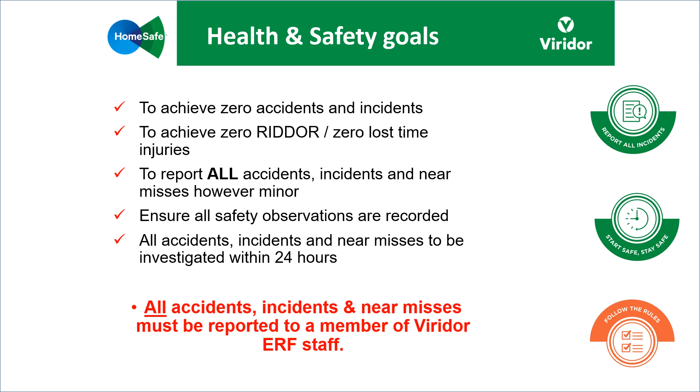These are our health and safety goals for this year's outage: to achieve zero accidents and incidents, to have no lost time injuries, and for all accidents, incidents and near misses, however minor, to be reported to a member of the ERF team, to ensure that all safety observations are recorded and all accidents, incidents and near misses are investigated within 24 hours.

CDM is short for Construction, Design and Management Regulations. This was brought in back in 2015 to improve health and safety in construction. The outage is covered by CDM regulations because the scope of the works being undertaken falls outside what would normally be considered general routine maintenance, and we're now considered to be a construction site for the period of the outage.

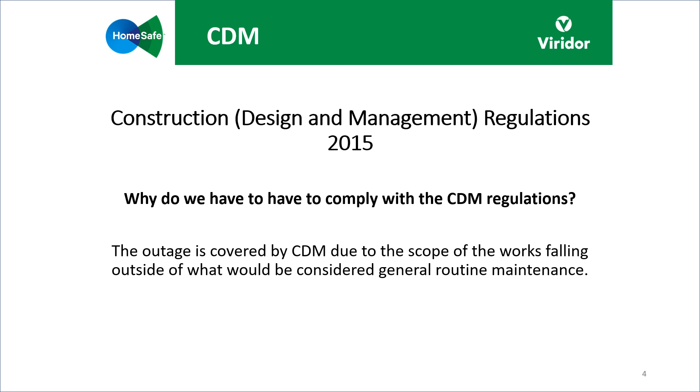BA Rescue will be providing our confined spaces management and security services on site, so please think of them as an extension of Viridor, and they will be able to answer any questions you may have around confined spaces or safety in general.

This slide shows the major works being undertaken during this year's outage and the main contractor assigned to each. If you have any questions, please reach out to a member of the Viridor staff.

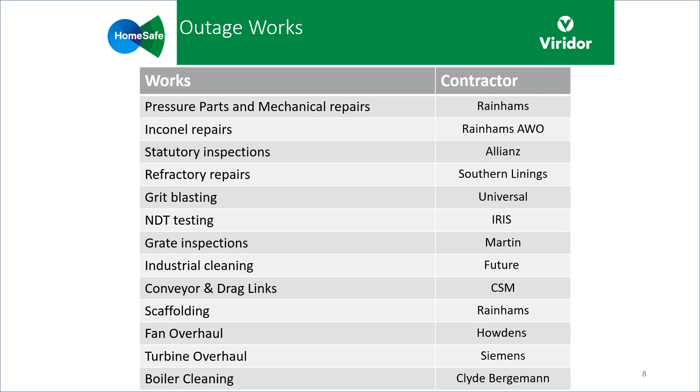So here's an aerial view of the site. Our weighbridge is located at Gate 1. The entrance to the Viridor staff admin car park is located at Gate 2. And the entrance to the contractor car park and welfare facilities is located off of Abbott's Lane at Gate 3.

There will be road signage to direct you to the outage village on the north side of the site, and the security office will be at the main entrance to the outage village. The main admin building is on the south side of the site, and the permit office is located on level 3 of the admin block.

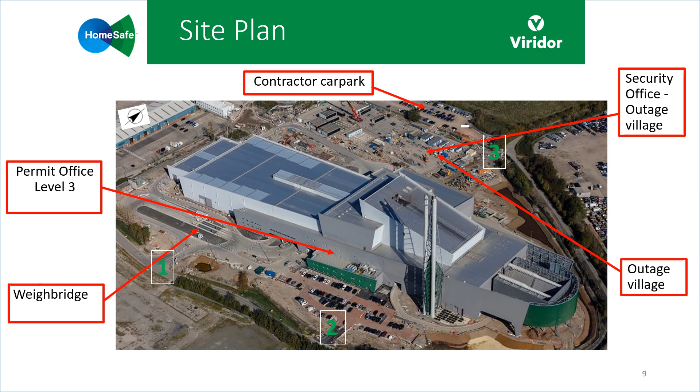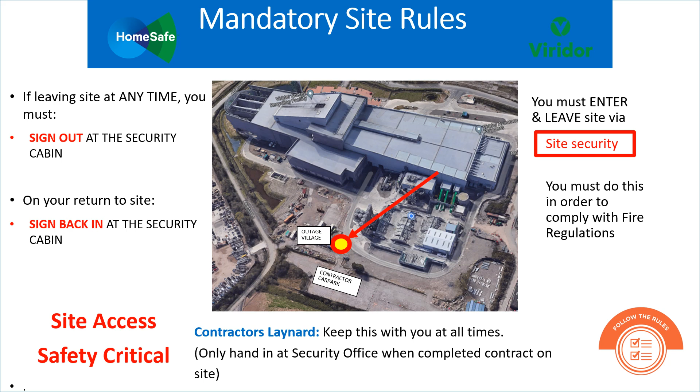The mandatory site rules and site access: you must always enter and leave the site through the site security office. This can be found at the entrance to the contractor welfare. You must sign out when leaving the site at any time, whether during your lunch break or at the end of your shift.

There's strictly no smoking or vaping anywhere on site apart from the designated smoking areas. There will be a smoking shelter in the contractor's welfare, and please ensure you dispose of any cigarette butts in the bins provided.

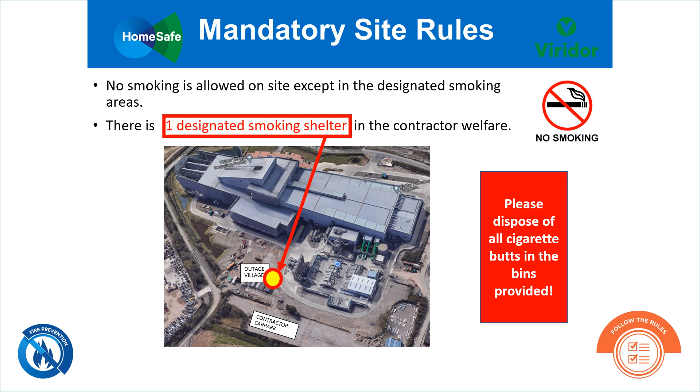It is strictly forbidden to steal, cause wilful damage, consume alcoholic drinks, bring illegal substances onto site, or engage in any other activities which could jeopardize the safety of any person. Such behavior will not be tolerated, and Viridor reserves the right to conduct random searches of both people and vehicles entering or exiting the site. An entry may be refused or you may be asked to leave if items found during a search cause concerns for the health, safety and welfare of all on site.

If you do not comply with the site rules, you may be issued with a yellow or red card. A red card means that you'll have to leave the site immediately, and listed on the screen are just a few examples of infringements that would lead to a card being issued.

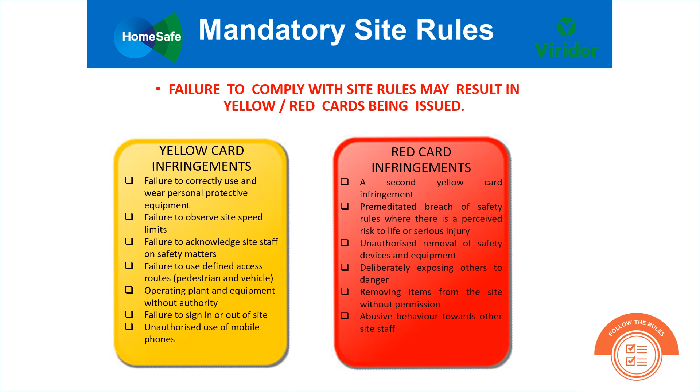The Operations Control Room is responsible for coordinating all emergency responses for fire, first aid, or spillage, and this will be done through the duty shift team leader. If you discover a fire, raise the alarm immediately and inform a member of the Avonmouth ERF staff.

Everyone on site must go to the muster point as quickly as possible if the evacuation alarm sounds. Not responding or responding slowly may lead to the yellow card being issued. Our fire alarms are tested weekly at 10 o'clock every Thursday. When the alarm goes off in this instance, please do not do anything. However, if the alarm continues to go off, or if you hear it at any other point during the week, you must proceed to the muster point immediately.

The muster point is located in the Contractors Village car park. All contractors must make their way there as quickly as possible and make sure you've been accounted for by one of the Viridor fire marshals. You will only be allowed back to your work area when the all clear has been given by a member of the Avonmouth ERF staff, and do not leave the site unless instructed to do so.

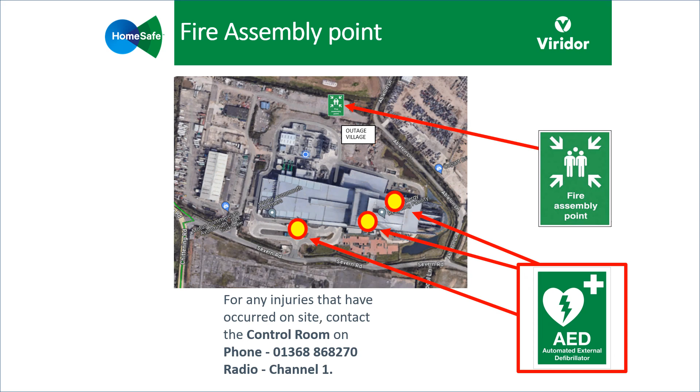There are also a number of automated external defibrillators on site, including the weighbridge, the Level 3 permit office, and the ground floor of the boiler hall.

Car parking is located in Gate 3 off of Ableton Lane, and remember you must reverse park. Please car share wherever possible.

The offices and welfare facilities will all be clearly signposted, and there will also be a hot food provider available in the outage village. A female toilet facility will be available, and under no circumstances should contractors be using the Viridor staff facilities. You, as the contractor, are fully responsible for the security of your own belongings and equipment whilst you are on site.

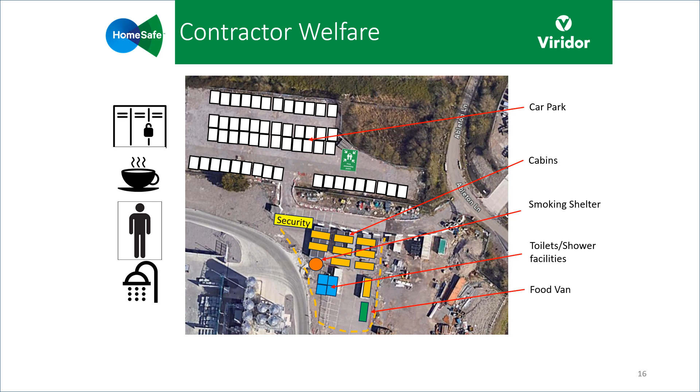The tap water in the welfare facility is drinkable, and there will be bottled water available out on plant. Please ensure that all of your waste is placed in the bins provided, and ensure that any electrical equipment brought to site is PAT tested.

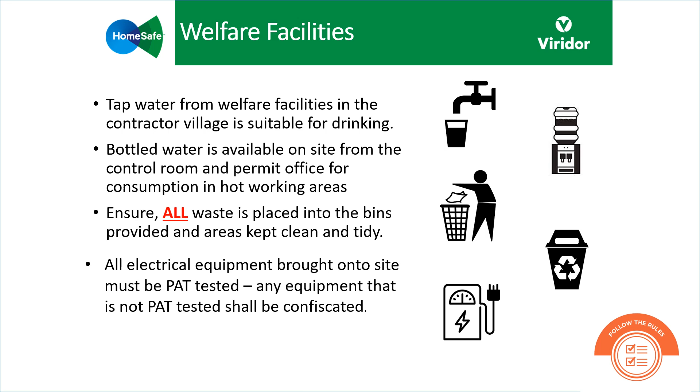All tasks require a safety document. Your risk assessment and method statement must be approved a minimum of 72 hours in advance of work commencement. A Viridor Senior Authorised Person, or SAP, will issue your safety document to protect you from the system-derived hazards.

The point of work risk assessment, or POWRA, must be collected from the permit office when your safety document is issued. The POWRA must be completed by your competent person before work is due to start, and general safety must be established by the nominated supervisor and recorded on the POWRA before the start of work each day. Any questions you have on this process, please contact a member of the Avonmouth ERF staff.

All permits must be surrendered each time you leave the site and at the end of every day. This must be done at the permit office and not left anywhere else on site.

No hot works can be undertaken without a permit, and specific permits are required due to the fire alarm and sprinkler systems on site. Hot work risk assessments will be carried out by a member of the Avonmouth ERF team, and working areas must be tidied up in line with your POWRA safety requirements.

The supervisor of each group, or single person if working alone, must have completed our competent persons and nominated supervisor training. Please contact the permit office for more information on this.

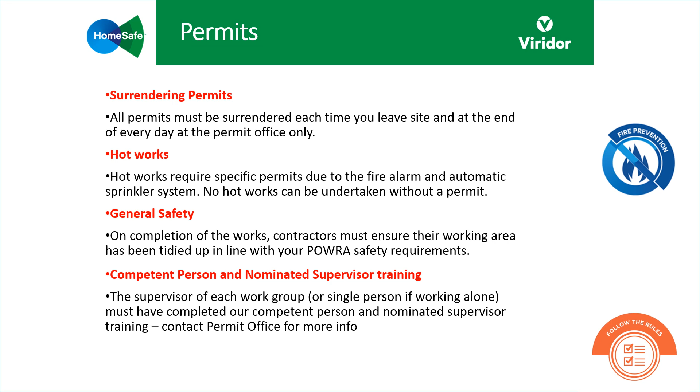The most common confined spaces on site are as follows: the furnace and grate, the second pass, the horizontal pass, the FGT inlet duct, the boiler outlet duct, under the furnace grate, the boiler drum, DA, condensate tank and all other tanks, and the turbine exhaust ducts.

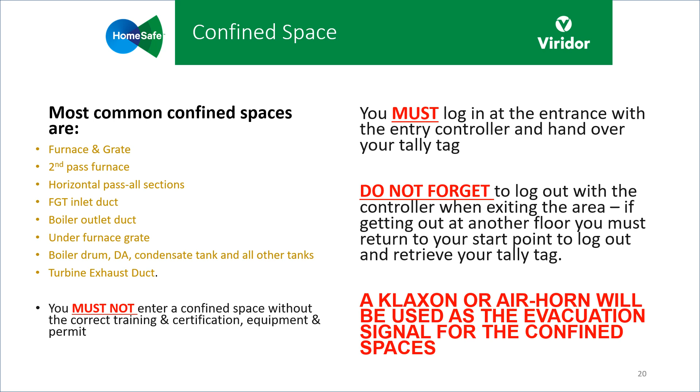To enter work in a confined space, you must have the correct training, certification, equipment and permit before entering. You must log in at the entrance and hand over your tally tag, and you may exit the confined space at a different level from which you entered it, so you must return to your entry point to log out and pick your tally tag back up. A klaxon or air horn will be used as the evacuation signal for a confined space.

Working at height will be part of the risk assessment and method statement produced before the commencement of any work. This can vary from the use of a MEWP or the use of rope access. Please ensure that what is written in the RAMS provided is followed exactly, and to clip on where appropriate, and using the access equipment correctly.

If using ladders, then they must be inspected by a competent person and have the correct inspection tags. Always visually inspect ladders before use and ensure they are used and stored correctly.

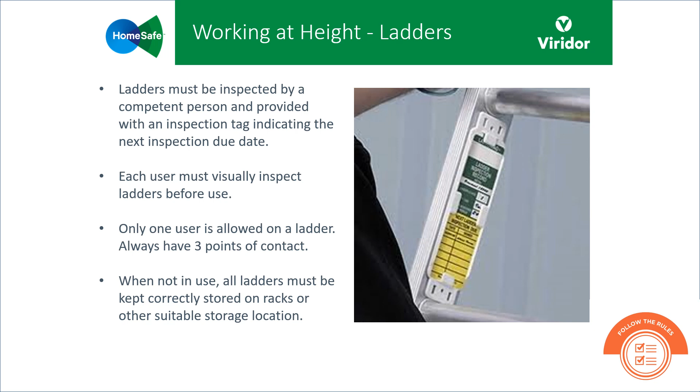It is Viridor's policy that ladders are only used for access and should not be used for work that could go on for a considerable amount of time. Please consult your supervisor if you are unsure on any of this.

All scaffolding must be erected, maintained and inspected in strict accordance with current legislation and only by competent, authorised personnel. The scaffolding team for the Avonmouth ERF outage will be Rainhams - please consult them for any questions regarding scaffolding. Before using, carry out your own visual inspection, and if you have any concerns or find any defects, report this immediately to a member of the Viridor ERF team or Rainhams, and do not use the scaffold until properly inspected and repaired.

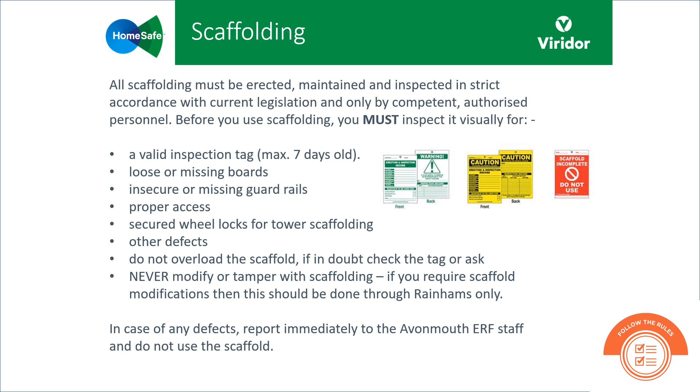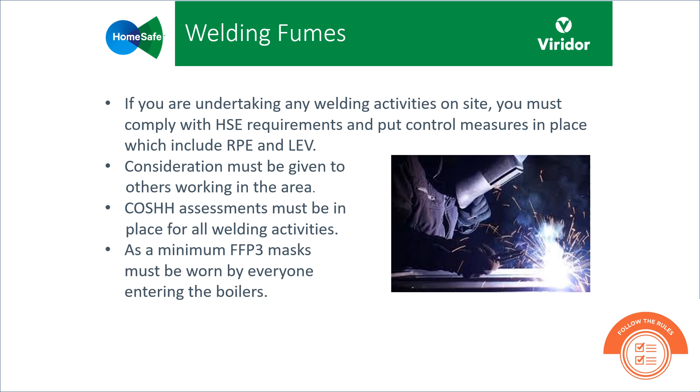If you are undertaking any welding activities on site, you must comply with the new HSE regulations and put control measures in place, including RPE, respiratory protective equipment, and LEV, local exhaust ventilation. Give consideration to others working in the same area and ensure a COSHH assessment is in place. At a minimum, FFP3 masks must be worn by anyone entering the boiler. If you're unsure, please contact your supervisor or a member of the ERF team.

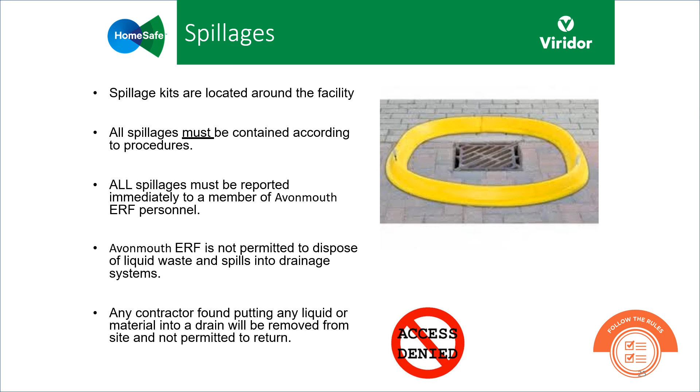Report all spillages immediately to a member of the ERF team, and ensure that any spillages are contained according to the procedures in place. Spillage kits are located around the facilities and are clearly signposted.

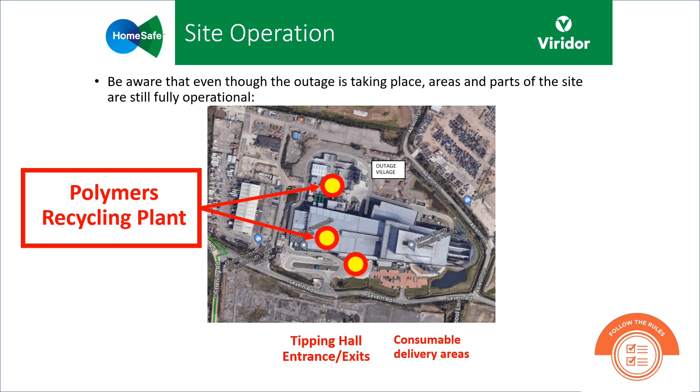Please be aware that there are areas and parts of the site that will remain fully operational during the outage. This includes the exit and entrance to the tipping hall and the store's delivery area. Also, please note that the Viridor polymers plant will be in operation throughout the duration of our outage. So remember, please stay in your designated area.

You must ensure you have correctly identified the plant or equipment before the commencement of work, and do not start work if you have any concerns at all about the equipment or isolations. Remember, no work can be carried out without a permit.

Good housekeeping prevents accidents. So remember to keep your point of work clean and tidy, ensuring walkways are kept clear and all litter is disposed of in the bins provided. Do not rely on others - good housekeeping is everybody's responsibility.

Good, clear communication is vital and will help support a successful outage. There will be a daily team and progress meeting at 9 AM in the ground floor admin block meeting room. These will be attended by the site management team, SAPs, STLs, and a supervisor from each contractor. Please ensure you feedback any news or updates to your supervisor prior to these meetings. A progress meeting will be held in the same location at 4 PM every day.

If standards fall below expected standards, then an all-site stop may be used.

Be aware that there will be a higher volume of people on site than normal, and many people may be unfamiliar with the site. Think about the task you're doing and how it might impact on others. Look out for one another even if they're not part of your team, as we all want a successful and safe outage.

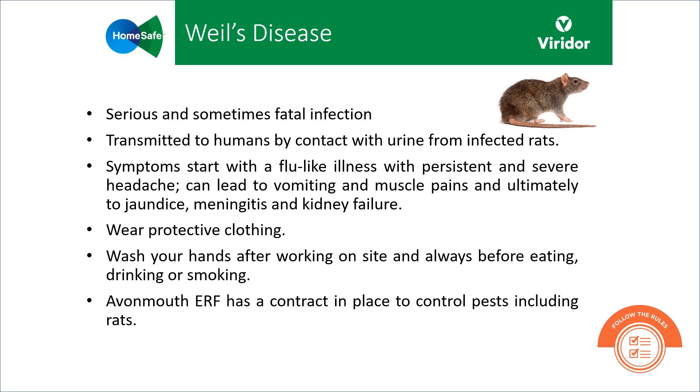As a waste management site, we have a duty of care to inform you of a disease called leptospirosis, or Weil's disease. This is transmitted to humans through contact with infected rat's urine, and it is a serious and sometimes fatal infection that can start with flu-like symptoms but can lead to serious complications and possibly death. You can reduce the risk of transmission by wearing protective clothing and washing your hands after working on site, and always before eating, drinking, or smoking. There are various bait boxes on site, and we have a pest control service agreement in place. If you have any questions, please speak to a member of the Viridor staff.

CCTV operates across the whole site and is used for safety and security purposes. Please be aware that you may be on camera whilst working and that this can be used in the event of an accident, near miss, and for general site compliance.

And finally, I would like to thank you very much for your time today, and please remember that if you're unsure about anything, you must ask, as there's no such thing as a silly question. So please never assume, and let's ensure that everybody gets home safe.